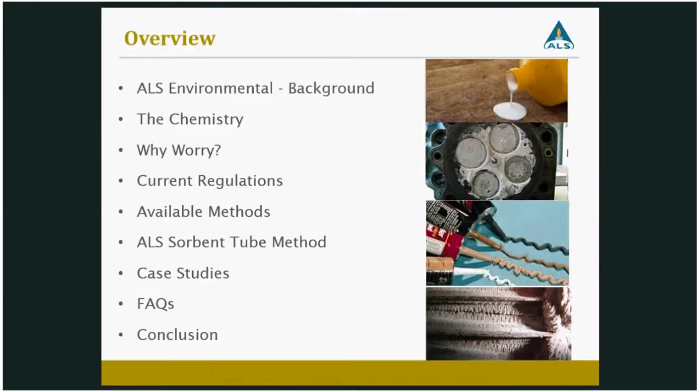ALS Simi Valley is a 20,000 square foot facility located in Simi Valley, California. We were formerly Columbia Analytical Services. Some of you might know us as that if you have done any analytical work with us. As a lab, our particular location specializes in air analyses. As far as ALS Environmental as a whole, we're an international company based out of Australia. We have 14 labs in the US and Canada, but our particular laboratory focuses on air analyses.

We do low-level environmental work, remediation, fence line monitoring, ambient air, vapor intrusion. We're DOD and NELAP certified, but we also have a specialty market that's specifically geared towards landfill gas.

As far as our areas of expertise are concerned, we can do things like permitting and compliance, things like Tier 2 monitoring or 40 CFR testing. We can also do energy content - that would be things like BTU testing or methane content. Methane content can also fall under gas composition. Gas composition could be things like the oxygen or carbon dioxide content of your gas, or your percentage of methane. We can also analyze for a number of other fixed gases, as well as VOCs and hydrocarbons.

And then finally, we have this niche market for odor and nuisance testing. While I won't talk much about that, we can analyze for things like amines, volatile fatty acids, and sulfur-containing compounds as well. So we really can round out your landfill gas analytical needs just in one particular location.

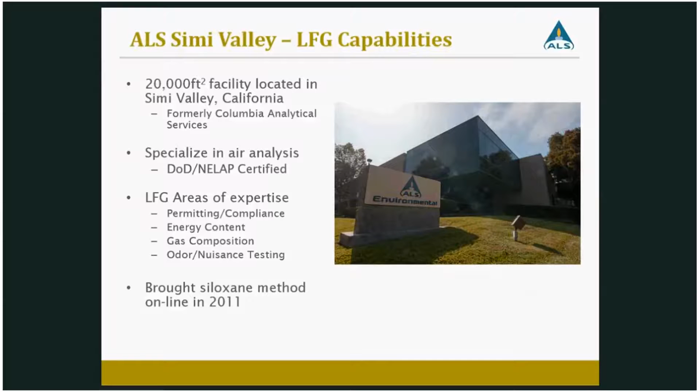As far as the siloxane method is concerned, we brought it online in 2011, specifically for landfill gas patrons. We had a number of clients coming to us asking about siloxanes, and so we brought a method online to try and meet that need. We've been running regular samples since 2011.

So, siloxanes - what are they? Well, siloxanes fall under the volatile organic compounds grouping. The word siloxane is derived from the words silicon, oxygen, and alkane, so it's kind of a cutesy combination of the three words. The compounds are labeled according to the number of silicon and oxygen bonds.

Siloxanes fall into two primary categories: cyclical siloxanes, which for those familiar would be labeled with the D symbol - D2 through D6. And then you also have the branch chain siloxanes, shown in blue on the left, which would be your L or your MM, MDM compounds.

While siloxanes aren't necessarily hazardous to inhale, they do have oxidative properties, so when they are in the presence of oxygen and heat, such as in combustion, they will combust into silicon dioxide, carbon dioxide, and water. This silicon dioxide is otherwise known as silica or sand, and this sand can end up building up on a number of different pieces of equipment.

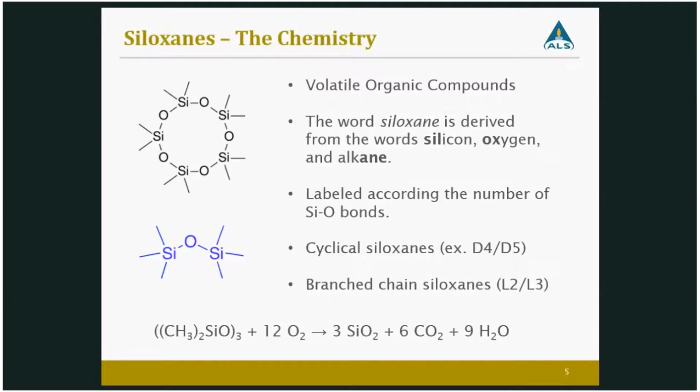So why should we worry about them? Well, while they don't necessarily have any hazardous effects to human health, they do occur in ppm levels in landfill gas, which is what you usually find them in. They will oxidize in your post-combustion systems and end up depositing silica onto your equipment, causing performance and maintenance problems.

Commonly affected equipment could be things like cylinder heads, pistons, turbine blades, heat exchanger surfaces, and boilers. And they could end up causing symptoms such as wear or imbalance.

They could cause fouling. I have some anecdotal information from a landfill operator I used to work closely with that says the engine power reduction could be as much as 10 to 20%, and you could have as much as twice the required frequency of motor oil changes for your engines. Ultimately that could lead to potential engine breakdown and increased operating costs. So siloxanes end up causing you to spend more money in the end.

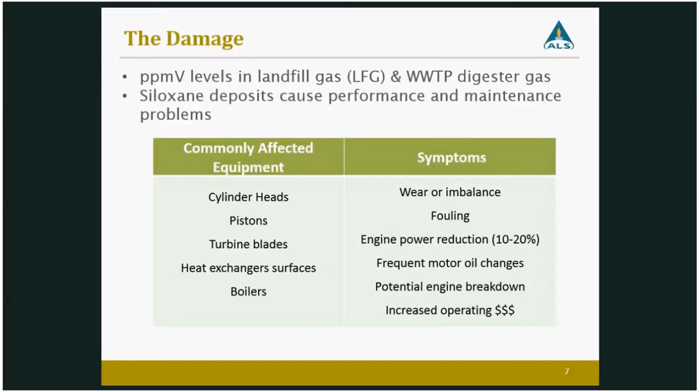For the visually inclined, the next couple slides are going to be a couple pictures. As you can see, the white dust on the engine pistons are silica deposits. This is a really good example of some of the more common buildup we see on engines. This powder just ends up building up until it causes failure on the engines.

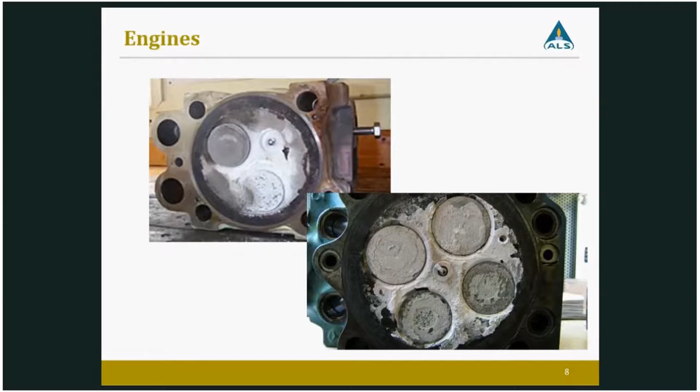As far as turbines and microturbines are concerned, they are some of the most susceptible pieces of equipment because they are extremely temperamental, especially when it comes to siloxane buildup. As you can see, that microturbine on the right-hand side looks like it's been underwater or something - it's just so covered in dust.

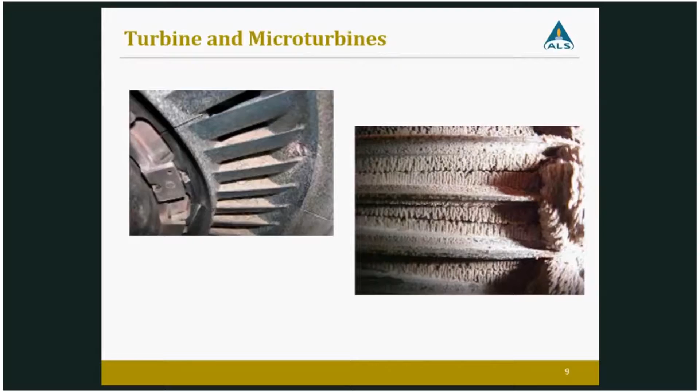So siloxanes, where do they come from? Where in the landfill? Where in the wastewater treatment plant? What causes siloxanes to be so prevalent and such an issue for landfills? Well, first and foremost, they come from a number of household products. They are used to smooth, to soften, to moisten, to make things glide on more easily.

They're also used for water repelling, like windshield coatings and things like that. You pretty much can't go down a drugstore aisle without finding a significant number of products that have siloxanes in them. So in essence, we use these products in our house, we throw them away, they end up in landfills, and using the volatility of the siloxanes, they end up in the landfill gas.

They're also really common in plastics and adhesives, mostly because they give plastics a bendable property - they make them more malleable, not so rigid when siloxanes are part of the mixture. They're also used in a number of lubricants and paints and things like that.

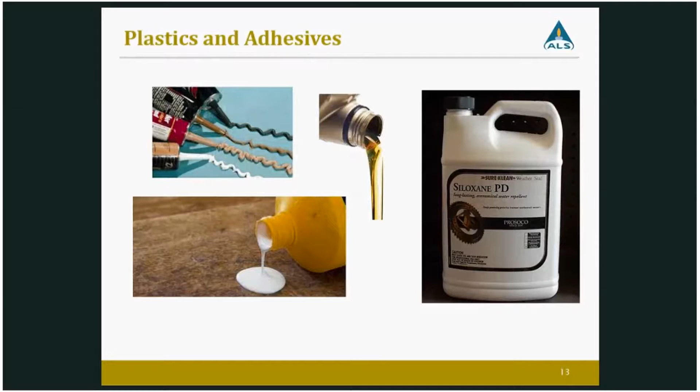And then finally, and kind of most interestingly, they're also used in synthetic food products. Siloxanes are used in a number of fat-free products because they give people the mouthfeel of fat without the calories of fat. So you'll find it commonly in fat-free and low-fat foods, as well as siloxanes commonly used as an anti-foaming agent in fried foods, added to the oil to keep the foaming down during the frying process.

So, current regulations - well, I hope I'm not pulling your leg by saying I was going to talk about current regulations, but unfortunately there are no state or federally promulgated regulations at this time. Unfortunately, siloxanes are ultimately more of a manufacturer nuisance rather than them actually being hazardous - that is, dangerous to humans, dangerous to animals, or even necessarily dangerous to the environment. Ultimately, without the whole combustion process, siloxanes really are fairly harmless.

There is an ASTM group that I am a part of that was tasked with creating a siloxane method, and it's going to be in the group D03, which is the gaseous fuels group. I imagine the method will probably be promulgated in 2016, so stay tuned for that. Otherwise, there are a number of commercially available methods that I will go into in later slides.

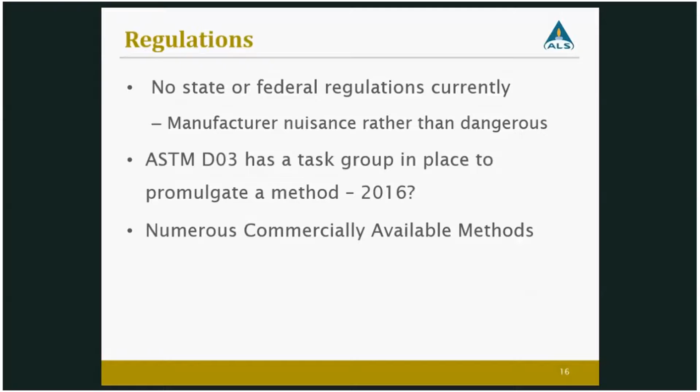So even though there are no federal bodies regulating siloxanes and no federal bodies with methods for siloxanes, there are a number of different siloxane methods currently available. So let's go into commercially available methods.

Just as a visual overview of what methods are out there, they're really separated into your collection devices. We'll go into more detail, but ultimately, if you're going to analyze for siloxanes, you're going to be doing it using one of these 5 collection devices. We have the sorbent tube in the top left-hand corner, that's what ALS uses. Going clockwise, you could collect in a Tedlar bag, mineral oil, using a Summa canister, or a methanol impinger.

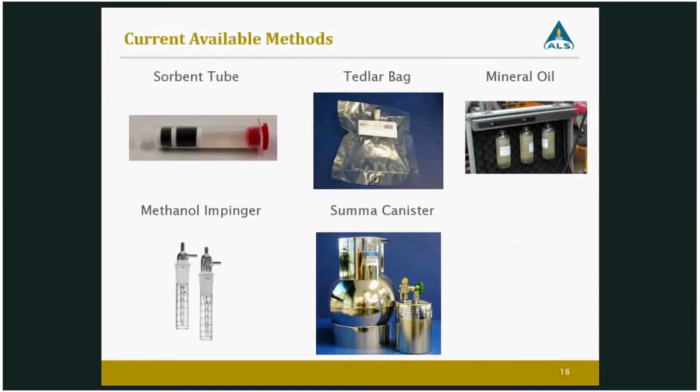I created this table to show just an overview of what is required between ordering, collection, and ultimately shipping. As far as the methods are concerned, they're really grouped into 3 different categories. You have your Tedlar bag and your Summa canister, which are considered whole air methods. That means you would just collect the air as is. It doesn't absorb to anything. It's not bubbled through anything. And then from there, you would send that physical air sample to the lab for analysis.

You also have a sorbent tube, which uses adsorption onto a solid media. In essence, you would pass your air through the tube. The siloxanes would adsorb onto the solid sorbent, and everything else would go straight through. And then you have methanol impingers and mineral oil, where you're bubbling your air through a solution of some kind, and the solution is what is adsorbing your siloxanes. So those are the 3 main categories.

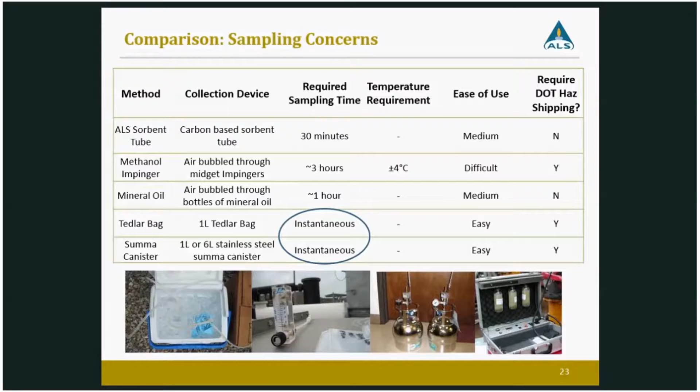As far as the required sampling time, it's really based off of 2 categories. You have your instantaneous - the nice thing about Tedlar bags and Summa canisters is that sampling is relatively instantaneous. You would just hook up the sample to your gas source or your sampling probe or whatever you wanted to analyze, and you would have an instantaneous sample with no real sampling time involved. And then you also have the time-integrated samples, which would be anywhere from 30 minutes to 3 hours, depending on what methodology you're following.

We have the ease of use requirements, which is really a subjective statement. It's based off of things like how much time is involved in training sampling personnel, how long does it take to sample, what are the temperature requirements, if there are any, as well as whether it requires Department of Transportation hazardous shipping.

Tedlar bags and Summa canisters are easy because of the instantaneous sample and they don't require a cooler. The mineral oil and sorbent tube are medium because they are time-integrated samples, and they do require a little bit of training on the personnel front. The methanol impinger is considered difficult because it has some training, again it does require some time, but ultimately it has a temperature requirement, which means you have to ship it in a cooler. So it's time sensitive as far as getting the samples to the laboratory.

The final thing to note, which is something that we at the lab always try to instill in the client, is whether your sample shipping requires Department of Transportation hazardous shipping requirements. Now, even though Tedlar bags and Summa canisters are extremely easy to sample, they're extremely difficult to ship, especially if you are dealing with landfill gas. Landfill gas is typically 40% or more methane, and 38% or more methane of any sample means that it is subjected to the Department of Transportation hazardous shipping requirements.

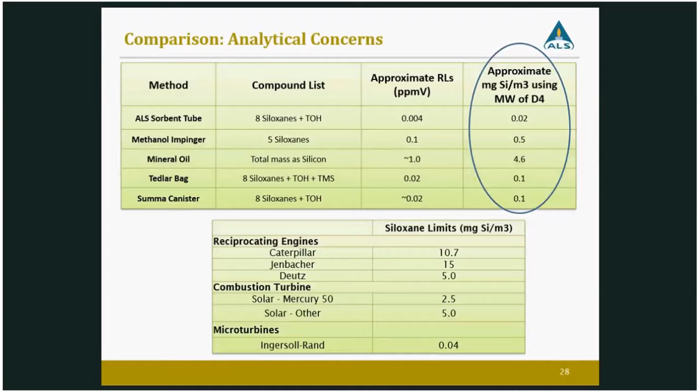So you'll want to always make sure you're cognizant of that before you choose a lab. Okay, so just to round out the sampling overview: impingers are unfortunately difficult to sample. They're medium in weight, they require hazardous shipping and a cooler, and they have moderate reporting limits.

As far as sorbent tubes are concerned, they're moderate to sample. They do require a little sampling personnel training. They're lightweight and easy to ship. They don't require any hazardous shipping or a cooler, and they have low reporting limits.

The mineral oil method is moderate to sample. I've heard from some clients that it's fairly easy to sample, and that's not a problem, but the boxes are heavy to ship. They don't require hazardous shipping or a cooler, but they have high reporting limits, comparatively speaking.

As far as the Tedlar bag is concerned, it's easy to sample and lightweight. It does require hazardous shipping. However, there is no cooler, and they have moderate reporting limits.

And then the Summa canisters are easy to sample. They're relatively heavy to ship. They require hazardous shipping, however, no cooler, and they have moderate to low reporting limits.

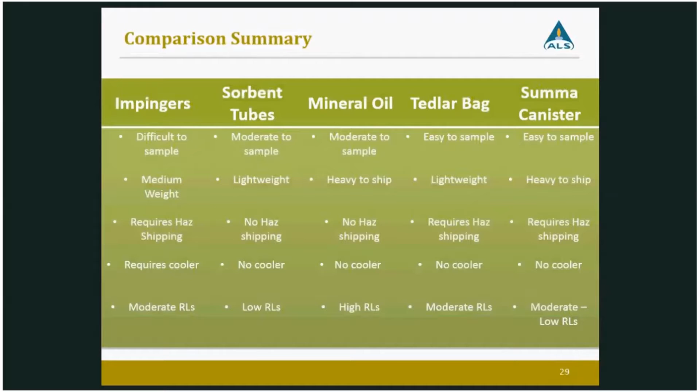So let's go into the ALS Tube Method 101 sampling overview. What would happen if you decided to call ALS and wanted to do a siloxane sample with us? Well, the first thing we would do is send you a sampling kit, which would include a rotameter, a pre-prepared slipstream, nuts and ferrules, a labeled calibration tube, and a sample tube as well. So you would have a tube to calibrate your flow, and then a tube to actually take your sample with.

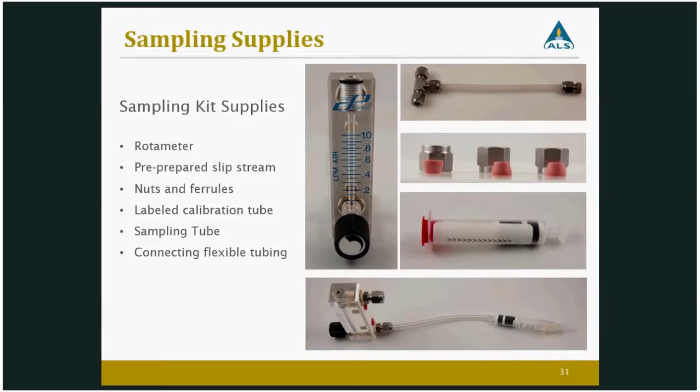And then there would be connecting flexible tubing, which would connect the calibration tube with the rotameter, and there would be flexible tubing on the slipstream. The slipstream we'll talk about in the next slide.

As far as the slipstream is concerned, it's really just a way of letting off excess back pressure to account for variability in flow. Now, we don't necessarily know how much flow is coming out of whatever outlet port you have, and so the slipstream is kind of a low-tech way of making sure there's no excess back pressure on the inlet of the tube.

So what would happen is you would hook up your sampling stream to a set of tubing. You would attach the tubing to the slipstream and then attach the slipstream to the sample. Now, the slipstream should be at the bottom of your sampling train, and the reason is because if you have any excess moisture in the tube, especially visible droplets, this would ensure the droplets build up at the bottom rather than on the back end of the tube.

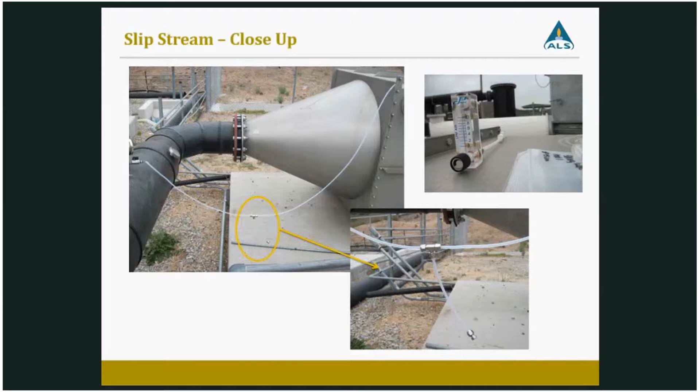Now, when you're calibrating the flow, since the recommended flow is 200 mils a minute, let's say your flow is a liter a minute coming out of your outlet. Rather than having to lower the flow coming out of your barbed fitting or whatever your outlet is made of, you can just open the bottom of the slipstream. There's a little cap down there, and that will let off any of the excess flow without cross-contaminating the sample, and without having to do too much to the sampling.

As far as transit to analysis is concerned, the shipping temperature is ambient. Again, you don't need any cooler, and there's no hazardous shipping requirement. The tube and the kit weigh under 5 pounds, so return shipping is light and easy. All of the pieces are plastic, so you don't have to worry about anything breaking. As far as laboratory considerations are concerned, the hold time is 14 days.

Between receipt and getting your results, the standard turnaround time is 10 business days, so about 2 weeks. Our compound list includes the 8 siloxanes, L2 through D6, and trimethylsilanol. As far as reporting is concerned, we report it in 2 units.

We report it as the siloxane, so we give you the value as L2, as L3, as D4, D5, etc. And then we also quantitate it as silicon. So we take the ratio of the number of silicon atoms and then the ratio of the molecular weights.

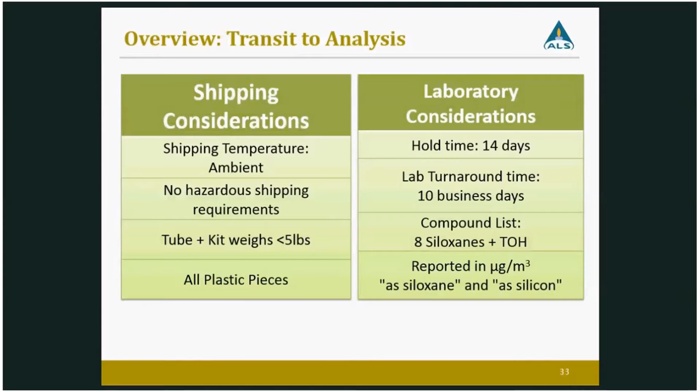The first case study has to do with when we were doing our initial method development of the sorbent tubes. The internal study was led in 2011, and it was conducted at a local landfill. As far as the landfill is concerned, they flared 80% of their gas, and 20% went into a condenser, and then they used it on a few of their engines in-house. So as far as what we were collecting, it was raw, untreated landfill gas.

Now, the methodologies that we utilized when we were doing the internal study included canisters, the treated carbon sorbent tubes that we ended up utilizing, as well as impingers.

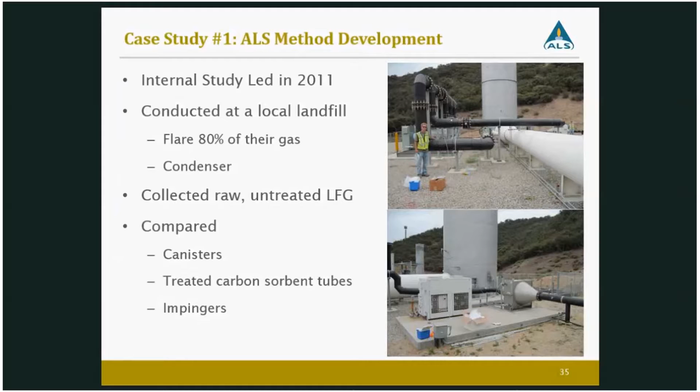This is a basic comparison of the siloxane recoveries that we saw. Now, the landfill itself didn't want us to share the physical recoveries, so I created a concentration ratio, which was based off of the percentage of the largest recovery. As far as the largest recovery is concerned, that looks like it was D4 in the impinger.

As you can see, from the raw untreated landfill gas, the trimethylsilanol, D4 and D5 were the greatest offenders as far as siloxanes are concerned. And that is extremely typical as far as landfill gas is concerned. I believe that it comprised almost 80% of the total mass quantitated for all of the methods. And L3, L4, and L5 were relatively negligible, less than 5% of the overall mass.

As far as the canisters are concerned, we noticed that all of the recoveries of the siloxanes were lower than, A, all of the methods combined, and B, what was most interesting was that they were usually significantly lower than the average. So that was something that ultimately made us decide that we were not going to move forward with the canister method, because of the biased low recoveries.

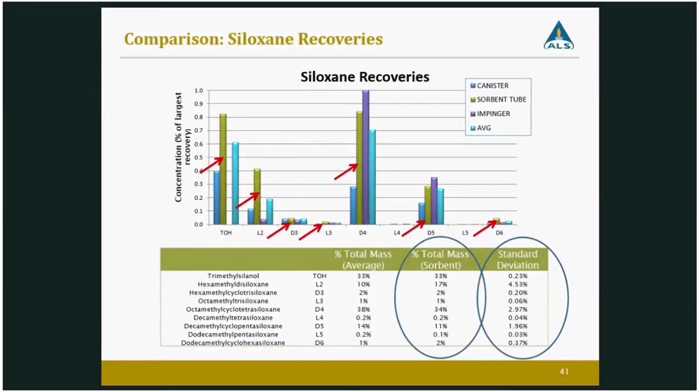So this table and graph are a comparison of the percentage recoveries of each of the target analytes, trimethylsilanol, L2 through D6, as compared to each of the recoveries from each of the methods. So what I did was I created a value of 1 for the ratio, and I made the sorbent tube, which was the most median and average recovery, as a ratio of 1, and then I compared the canister and the impinger values to the sorbent tube.

So this doesn't necessarily consider the abundance of each of the analytes, but rather the precision of the methods as they compare to each other. As you can see, again, the canister looks like it's biased low. It's lower than the sorbent tube, and it's pretty much lower than the sorbent tube and the impinger for all of the methods. While the impinger is definitely comparable, again, it doesn't have any trimethylsilanol capabilities.

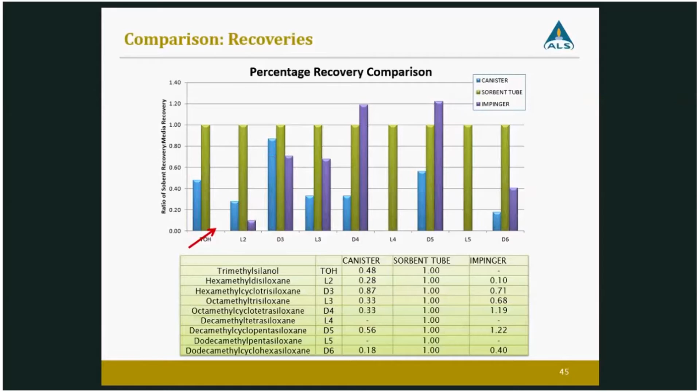Ultimately the conclusions are D4, D5, and trimethylsilanol are the primary siloxanes of concern. L3, L4, and L5 were relatively negligible and can be listed as non-important compounds comparatively speaking. Ultimately our goal was to identify which one was the best sorbent or the best collection device, which we decided was the sorbent tube, as it was the most comprehensive of the methods and it had the highest and best overall recoveries.

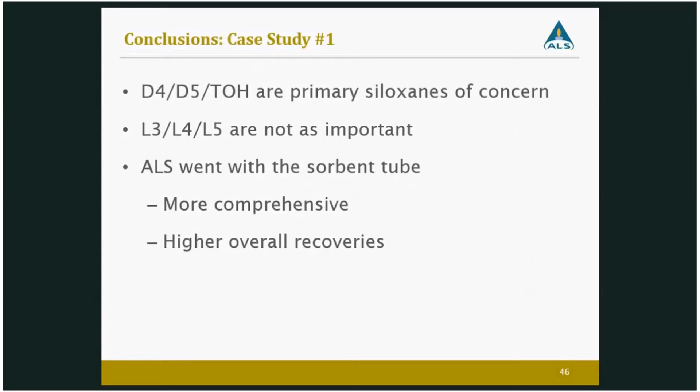So as far as case study 2 is concerned, this was a client collection case study. It happened in a landfill in Oregon, and the landfill gas samples were taken to support an agreement with Caterpillar Financing. The client was ultimately an operator at a facility, and they collected and shipped mineral oil samples initially. When they got the results back, they were higher than they expected, and also higher than the recommended limit given by Caterpillar Financing. The limit, for reference, was 0.6 micrograms per BTU.

With the siloxane results being higher than they expected and higher than the limit, they were very concerned. The reason being, the engine was not showing any physical damage, no visual damage, there was no major siloxane buildup on the engine, so they were wondering how the values could be. I believe the values were 3 times higher than the Caterpillar limit, and yet they weren't experiencing any engine breakdown or increase in motor oil changes, etc. So they decided to run a comparison of 3 methods.

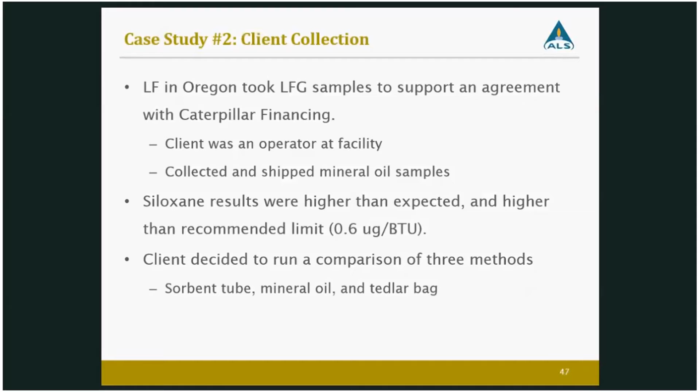They did our sorbent tube, they did the mineral oil again, and then they did a Tedlar bag sample. And these are the results. The table on top is just a comparison to show that ultimately, with 3 different collection devices, 3 different analytical instruments, and compound lists that were a little different, you could still get a microgram per BTU value from all of them.

As you can see in the results comparison, the mineral oil is significantly higher than the Caterpillar limit, shown by that thick red horizontal line. The Tedlar bag and the sorbent tube were both under that limit, which corroborated the fact that the mineral oil is either biased high or there was something wrong with the methodology. The Tedlar bag and sorbent tube values compared within 5%, which was corroborating evidence that they were under the limit and still within the specs outlined by Caterpillar.

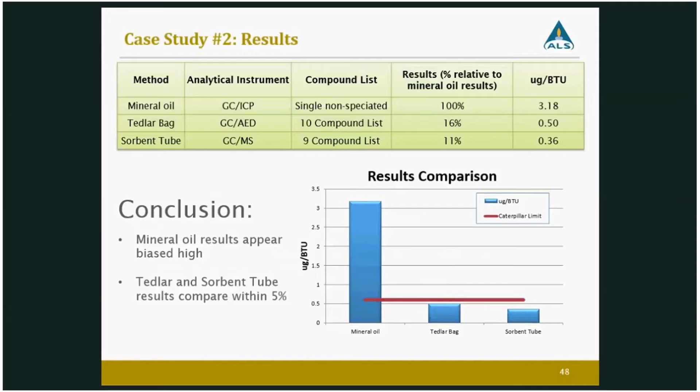So, why is there variance among method results? We've seen from both of these case studies that there is quite a bit of variance, and it's a question we get at the lab fairly regularly. What is the potential reasoning for why there's so much variability? The answers I'm going to give you aren't necessarily really good ones, but ultimately it comes down to the fact that there is so much variability in all of these methods, and it's because each lab has developed their own in-house method.

Each method has its own sampling media. They all have their own analytical instrumentation. They potentially have different calibration standards—you could use air standards or liquid standards. The target analyte list is different, and that is probably one of the more common reasons why the values differ. When you're getting a total mass silicon compared to an 8-compound siloxane report, it's almost like comparing apples and oranges in many ways, so that's something you're going to want to take into consideration.

Again, the reporting limits could be different. You could be analyzing a method with really high reporting limits that tells you nothing's there, compared to a method with really low ones that makes it look like there's a ton of stuff in there. But ultimately, you're just dealing with two different sets of reporting limits. And then finally, there are results calculations and reporting formats that potentially could cause confusion in the variability of results.

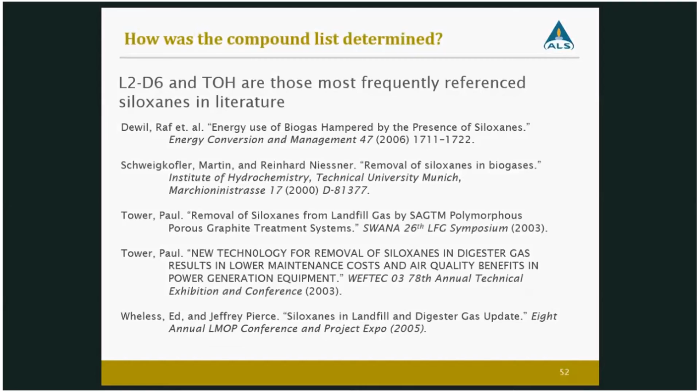So how was the method validated? How did you go about proving that the method was valid, correct, and accurate, especially in the face of many methods that don't end up correlating, as you could see with that mineral oil versus the sorbent tube versus the Tedlar bag method comparison.

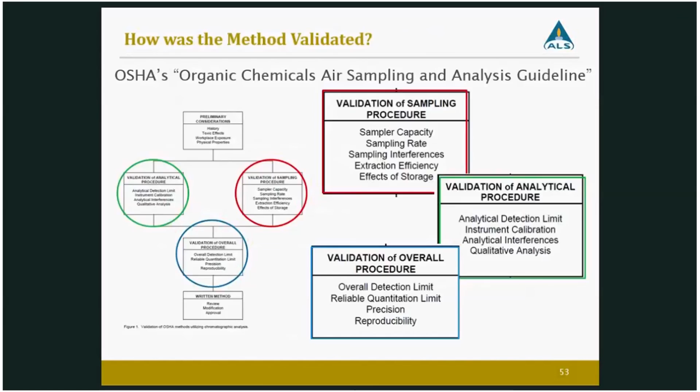Finally, how do environmental factors affect sampling? How does inclement weather, especially cold climates, affect it? In cold climates you do have potential loss due to tubing adherences. Siloxanes are not extremely volatile compounds, so when it's cold out you'll experience lower siloxane concentrations.

What we normally recommend to clients in colder climates is to use insulated or heated tubing, or if you don't have that ability, to make the sampling train as short as possible so you don't experience loss in the tubes, since there's less surface area to lose sample. We also offer sampling in Tedlar bags, and some clients opt to do that in cold weather as well.

As far as warm climates are concerned, there's potential loss due to moisture. Obviously when it's hotter, especially in humid areas, D3 and trimethylsilanol are soluble in water, so increased humidity or moisture in your samples could cause loss from that aspect. We do analyze siloxanes in water samples, so you could collect the condensate and send it to us for a full analysis—that's what we'd recommend if you're worried about loss due to moisture.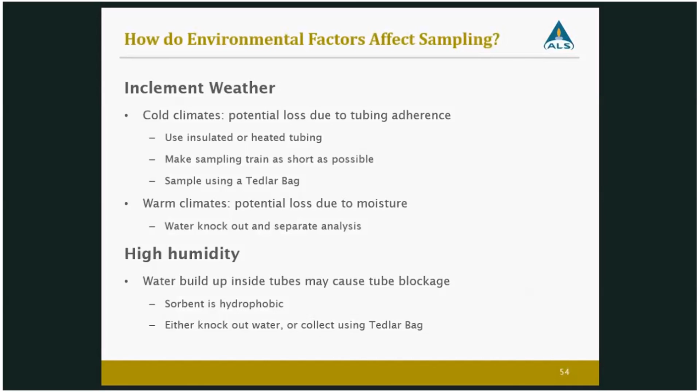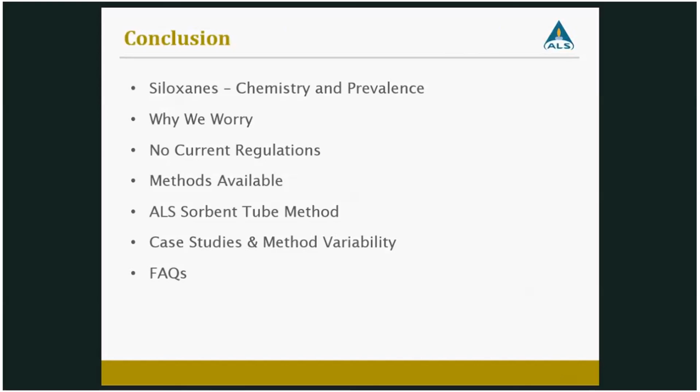As a basic conclusion of what I talked about today: we went into the chemistry and prevalence of siloxanes, why we should worry about them, and what makes them so troublesome to landfills and wastewater treatment plants. I said there were no current regulations, but there might be in 2016. I also covered a number of commercially available methods, including the ALS sorbent tube method, talked about case studies and method variability, and then went into some frequently asked questions.